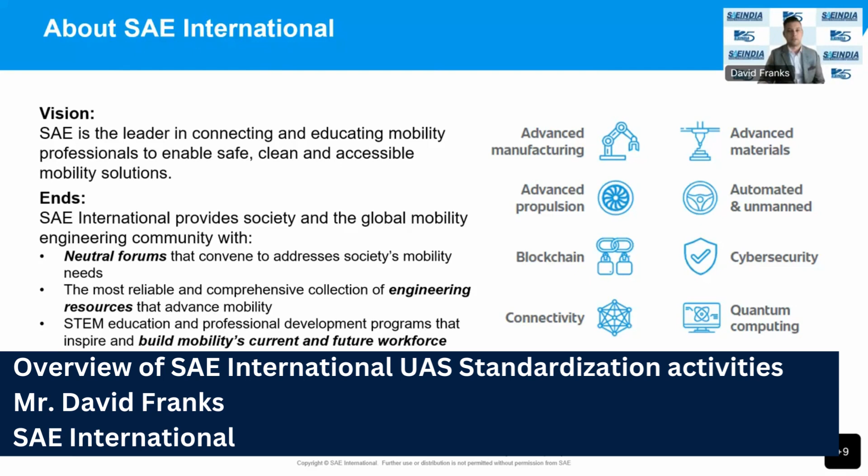So a particular focus that we've been working towards is to create stronger links between our standards and certification. Of course, I think that the number one step for a lot of the AAM OEMs is to get that certification route. So, especially with more and more performance-based requirements with this new technology, some of the regulators are moving towards requirements that are based on performance, and they need to utilize these consensus-based standards that we are capable of helping the industry produce, that detail these high-level means of compliance, or MOCs.

So we really look to our steering groups and our system-level groups, which sit atop our committees. And we look to them to create these roadmaps and guidance that come down and make sure that we're on track to produce exactly what the industry needs.

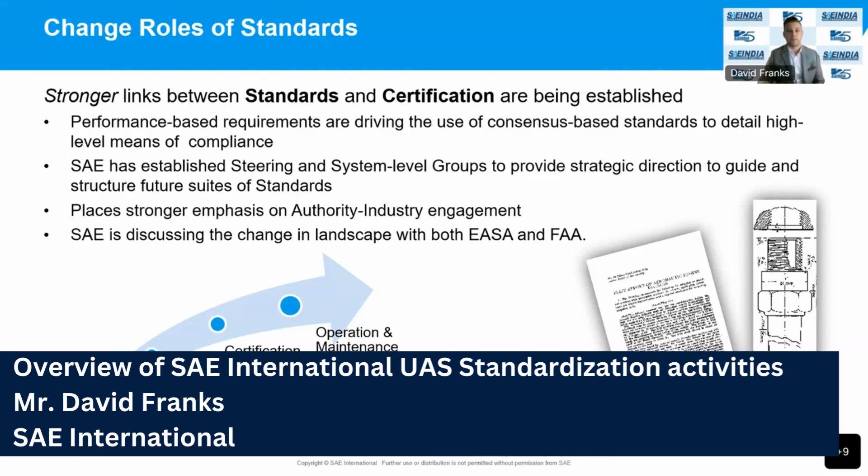Of course, we're in constant cooperation with SDOs and regulators around the world. Working with other SDOs prevents duplicate work, which, as everybody here that participates with SAE knows, it's no joy to be involved in other SDOs as well and see similar work going on at the same time. It doesn't help us, and it certainly doesn't help the industry move forward. So what we do is we have active collaboration and cooperation with multiple committees around the world.

That includes EUROCAE, IEEE, all the regulators, FAA, EASA, other SDOs like ASTM, RTCA, and higher level international organizations, including ICAO, and others. The scope of communication and involvement with the regulators is a great two-way exchange. They get industry perspectives and needs, and the regulators' goals and developing requirements can help inform both industry and standards. And a lot of the success we've seen, especially when forming new committees or new efforts, even new documentation, is that if we can get the regulators on board, industry tends to follow.

So again, it's a great tool that SAE provides to both industry and regulators for that forum where they can both come and speak a little more openly and make sure that they understand each other. So everyone involved in AAM understands the challenge in certifying these vehicles, involving the FAA and EASA and other regulators around the world. And this helps bring those cohesive roadmaps and solutions to bear.

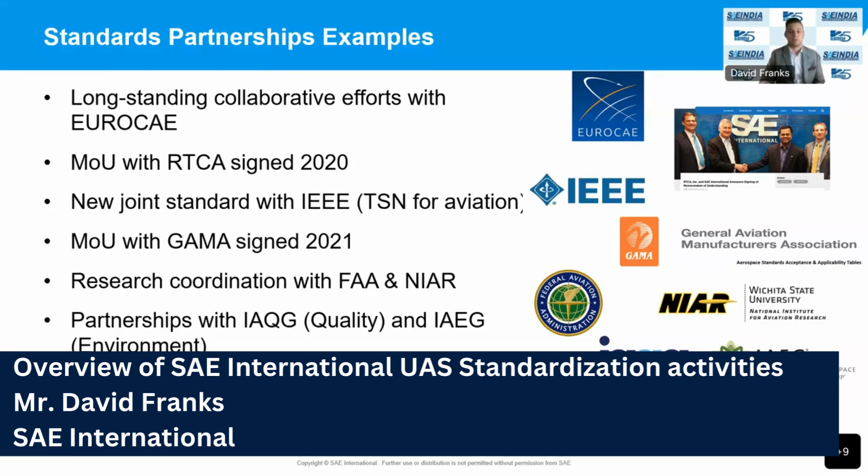So a lot of technology being used and developed for AAM is also present in the advancing ground vehicle and automotive world. Self-driving cars, hydrogen-powered buses, electrification, AI, public acceptance, just a few examples of this crossover in the tech. And that's really a strength of SAE as we have these two standards programs, right? We have aerospace and we have the automotive and the ground vehicle sectors. And they could both benefit from each other's successes. Hydrogen especially is a great example.

Hydrogen buses have been driving around for years now, as well as electrification with charging ports, with that industry being advanced on the ground for years. There's a lot that the aerospace and the AAM world can learn. And that's a strength for SAE, and what we're striving to do is to connect those two industry groups together so that existing tech and standards can be pushed over to the aerospace side for either quick adoption or maybe slight modification to make it work exactly with AAM, and to prevent, again, duplicate work and speed it up to an eventual standards publication, so that we produce those standards more quickly to help those industries move forward.

So the driving factor for AAM is to improve aviation's impact on the environment, of course. And we hear that again over and over out in industry, talking to the OEMs as well as the supply chain makers, the regulators, the city environments, the politicians and the people that are providing some of the funding as well. If it's not sustainable, then they don't want it. The investment isn't there. The industry is, of course, driven extremely by the environmental concerns.

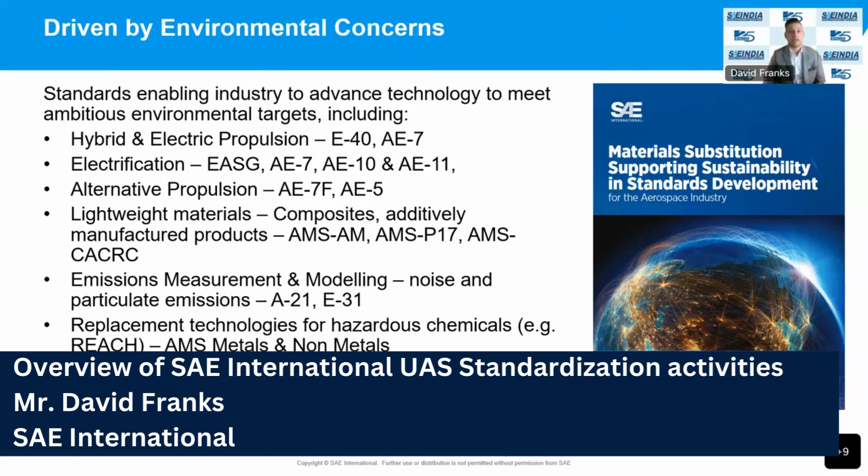So aviation alone accounts for around 2% or more of global emissions. And although we're not a major contributor there at 2%, the industry at large is working to reduce those emissions down to as low as possible. So for example, we support multiple efforts in that realm, not just base standards activities in our committees, but also supporting ACARE, REACH in Europe, ICAO's targets, and other key initiatives around the world.

I know David Alexander already went over this chart, so I'll just briefly say we have over 180 committees, thousands and thousands of individuals, including you all here today, around the world. And we had nearly 700 standards published in 2021. And I believe we're on pace to achieve that and more this year as well.

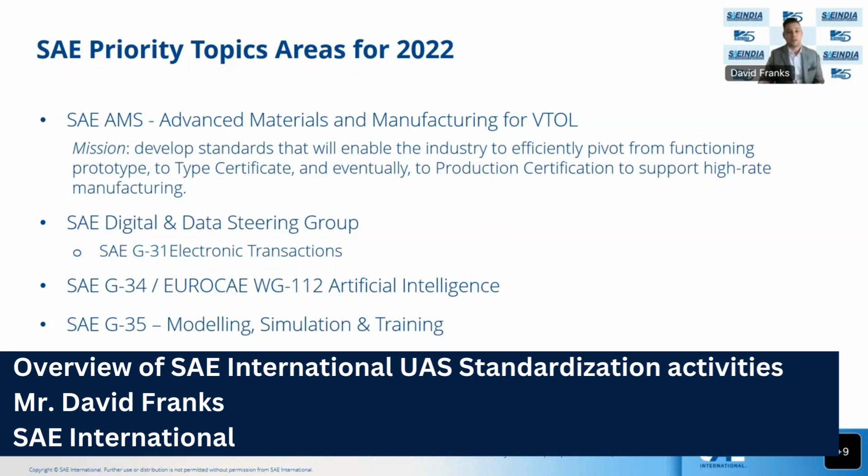SAE priority topics for the year. We set out many priorities, which of course involve AAM. They include advanced materials and manufacturing for VTOL, a digital and data steering group, a joint effort with EUROCAE on artificial intelligence, our modeling, simulation and training group, that's G35, as well as, which is very exciting, a new supersonic steering group. So even though I don't think a lot of VTOLs are planning to go supersonic, it's another part of this new wave of aviation that's exciting to be a part of.

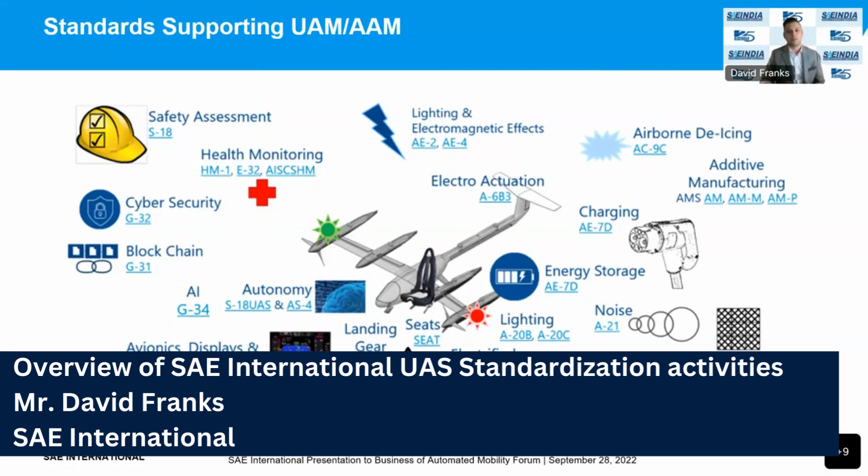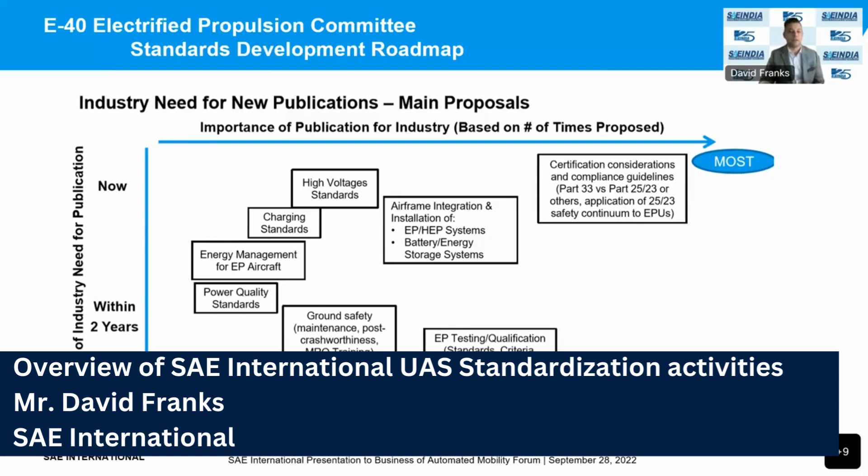Before anything, these things need to be certified and compliant with local regulations as well. And these are ever-evolving topics, but these roadmaps are the key to make sure that we weigh the relevance of what they're after and make sure that we utilize the best resources at hand.

So E40, again, has two newly published documents that have come out this summer. We have an ARP 8676, which is a nice foundational nomenclature and definitions, as well as AIR 8678, which is an architecture examples for electrified propulsion aircraft. So these are both foundational documents, and it's a great starting point.

A lot of times with new committees and new technological topics, it's important that these taxonomy, verbiage, and wording are all worked out and defined clearly, so that the committee itself, as well as industry, all move forward speaking clearly and using the same terminology, which is important so that they all understand each other moving forward. They align the terminology, and it's of course a baseline foundation for consistent communication and these future developments.

It's a very active committee. We see a lot of participation from a lot of the OEMs across the AAM world. I believe it's currently chaired by a gentleman from Lilium, the German OEM. They're now focusing on safety, endurance testing, and considerations for ground support operations.

So with the electrification of these aircraft, especially moving to high voltage, maintaining these aircraft, and even refueling in whatever sense that may take with the different versions of the electric aircraft, ground handling of these high voltage battery systems and engines becomes a training issue and a knowledge issue. So they've moved on to work with that. And we also coordinate this group with EUROCAE and ASTM.

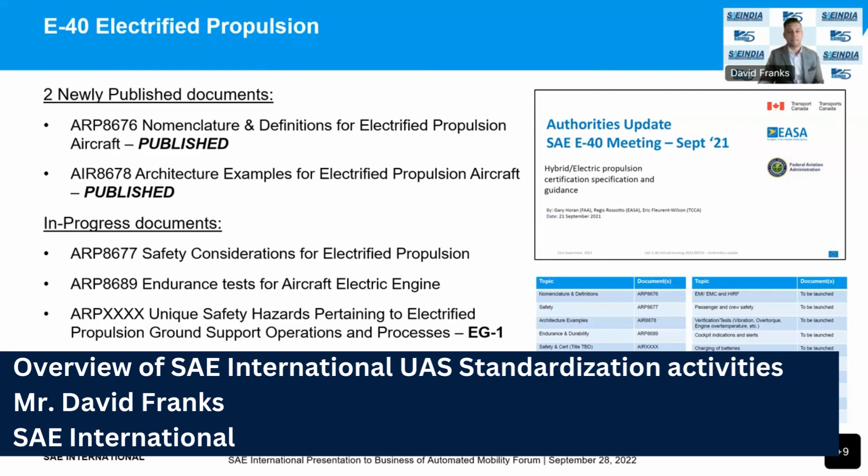So again, speaking of high voltage, we have our AE10 high voltage committee, which is of course focused on the more intricate versions and details of that. So with the use of the new and more powerful forms of electric propulsion in aviation comes the need for these higher power voltages. So these new challenges include propulsion systems, wiring, installation, safety, and charging. And that is our AE10 high voltage committee.

So they've formed 6 subcommittees over what they've deemed the most important subtopics: systems, energy storage, EWIS, equipment and the device itself, user safety, as well as infrastructure. So a lot of their key documents I have listed here. We of course started with definitions, and that's our aircraft electrical voltage level definitions. We have impact of high voltage on wiring. Both of those have been published, and we have a third document here which is close to finalization, and that's aircraft high voltage DC power quality standard.

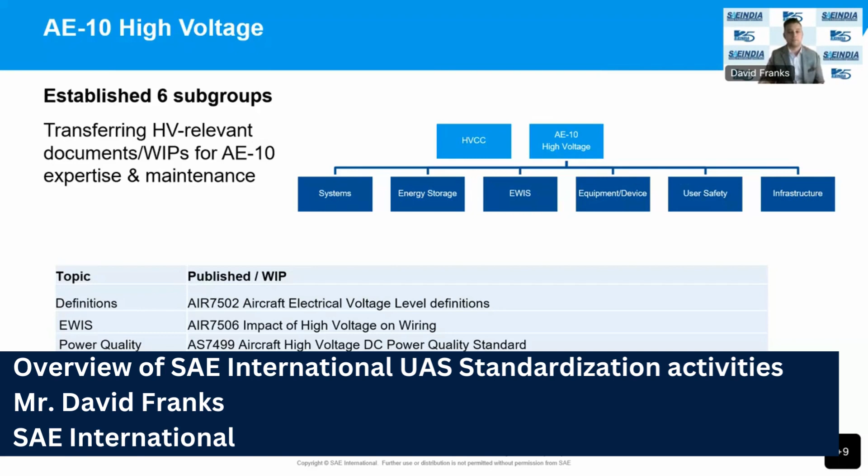So along with electrification, hydrogen and fuel cell technology is also developing closely with AAM as another alternative to traditional fuels. With battery technology's current weight to energy ratios, hydrogen is poised to have a great impact at longer distances. I think as the industry matures and the technology is accepted and public operations begin, electrification will run out of range a little bit, and the industry is looking, especially with the larger aircraft types, towards hydrogen. So hydrogen presents several challenges, both on the aircraft as well as the infrastructure to support it.

So our AE7F committee is working with EUROCAE, Working Group 80, to help advance these technologies and help solve these problems. They have 3 published standards that are key documents that they've used as a foundation. And they also have some newer work in progress, which is liquid hydrogen storage for aviation and gaseous hydrogen storage for aviation. So again, when using hydrogen, those are the 2 main choices so far. Both present different challenges, including temperature regulation and storage and different pressure ranges.

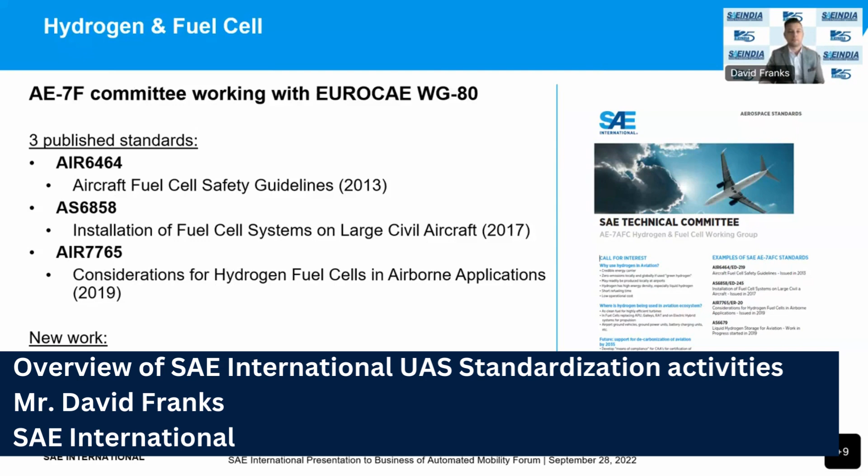It's exciting to see all the different new designs from the UAM and AAM realm. Some of these designs are pushing the bounds on structures and materials to save weight and increase performance. To accomplish this, new manufacturing techniques, new materials, and new uses for existing products abound. SAE has multiple committees and subcommittees established that are working on some of the key aspects

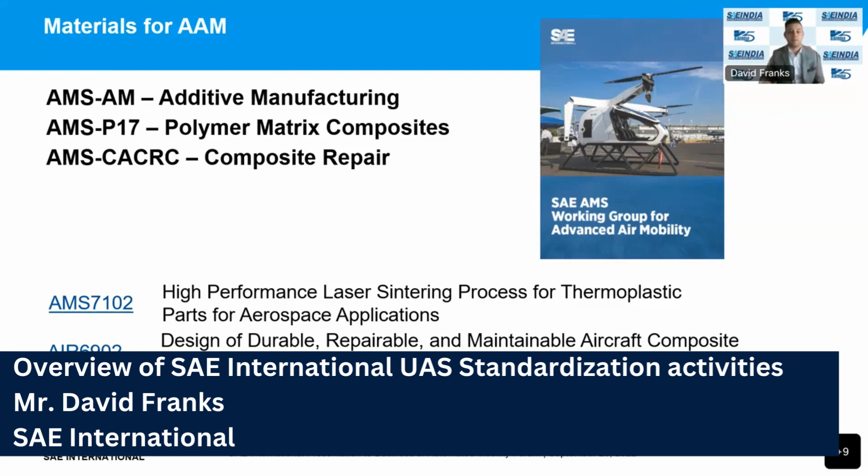such as additive manufacturing, composite repair, polymer matrix composites, really trying to serve the number of needs, especially with the smaller eVTOLs, as these initial rounds of OEMs are really creating these unique vehicles with unique design challenges. And of course, consistent everywhere with aviation is the drive to get that weight down as much as possible to optimize performance.

A great example here is the VTOL seats committee that we already have. And this is a great example of where we took an existing publication in a standard that was written, of course, well before the AAM realm, but was quickly adapted to help and serve the need of the AAM realm.

So they had a kickoff meeting held in just July of 2021 with great representation from regulators, EASA, FAA, the UK CAA, as well as AAM industry members, Wisk, Lilium, Safran, Hyundai, Bell, Collins, and then they did produce that. And it says they're balloted to council, but it has been published, AS 6849, which is performance standards for passenger and crew seats, specifically for advanced air mobility aircraft.

So again, I'd like to bring this up as a great example of where we took existing standards. We took it to the regulators and we involved the regulators and the OEMs and the industry itself. And we said, we have an existing standard. Can we quickly adapt that to what you need and really cut the time down from, of course, starting a document from scratch?

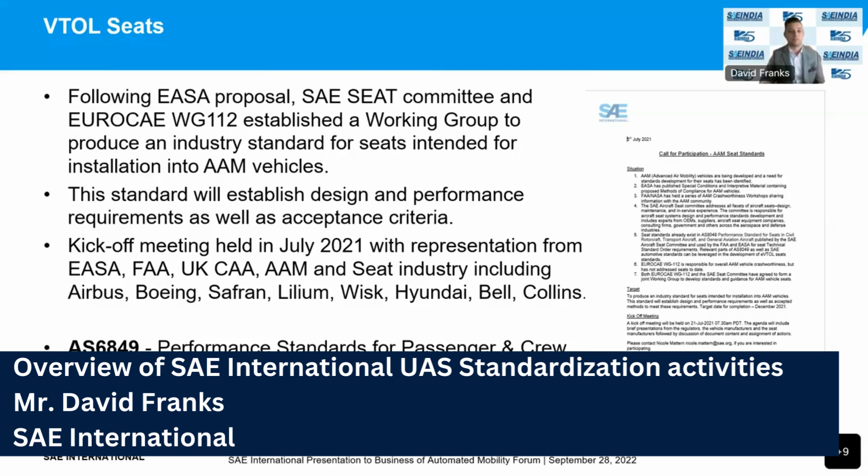A paramount concern for everyone involved in AAM is, of course, safety. New designs, new technology, flying new mission protocols requires that care is taken to safely design, test, and operate these aircraft. So the SAE S-18 Aircraft and Systems Development and Safety Assessment Committee develops and maintains guidelines for processes, methods, and tools to accomplish the development and safety assessments of aircraft, systems, and related equipment.

The group is dedicated to creating, preparing, and maintaining all the relevant specifications, standards, and information material for effective commercial aircraft development and safety activity management.

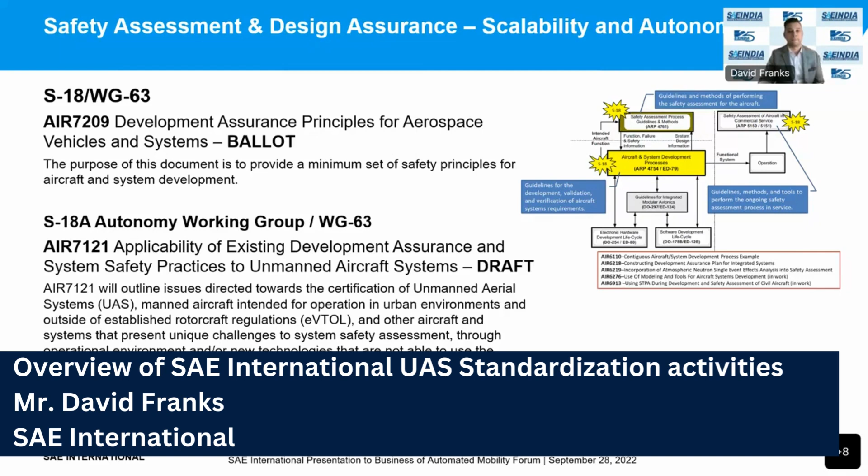Another exciting aspect to the future of AAM is the use of artificial intelligence and machine learning in these aircraft. The promise of UAM and AAM to deliver a safe, equitable, and publicly accepted new era of aviation will require a fully integrated airspace with thousands of these new aircraft operating in various mission profiles without a traditional pilot on board. Artificial intelligence, of course, will be pivotal in making this happen.

And that is exactly what SAE's G34 committee focuses on. It was formed jointly with EUROCAE. Their first standard was published in 2021. And with a wide range of global participation throughout the world's aerospace industry, this group is positioned to help UAM and AAM develop and deploy AI safely and successfully. And it's a key topic you see from the AAM world and the OEMs.

Of course, realistically, these operations will start as 1 or 2 flights with limited operations and ranges. But as their business models dictate in the longer term, they're all driving towards fully autonomous, fully integrated into the airspace, operating without pilots, or perhaps a new terminology, person in control from a remote ground station or dispatch.

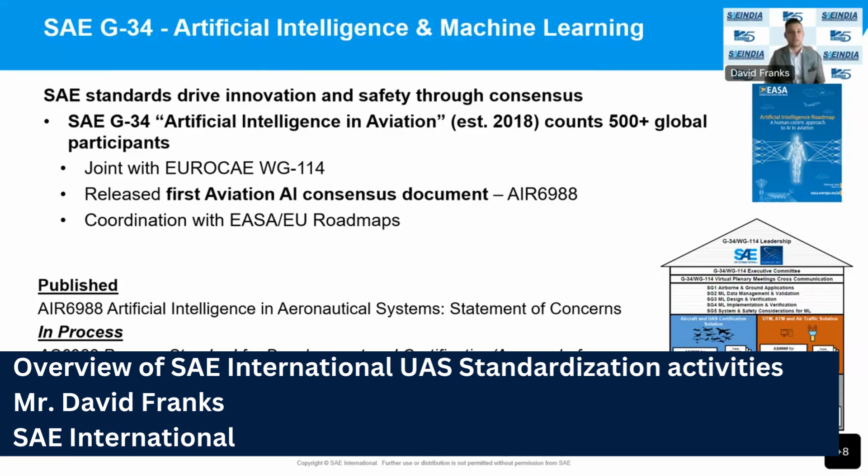Another key group that we have here is SAE's G35, which is modeling, simulation, and training. A key to the AAM success will be the use of new, efficient, and safe methods for training, pilot crew certification, and the use of simulation. Simulation in particular is used in model development, flight testing, and training, with new technologies emerging and the role of the pilot and crew changing with some of these new aircraft designs, if not all of them. There's a need to develop guidance on best practices for modeling, simulation, and training.

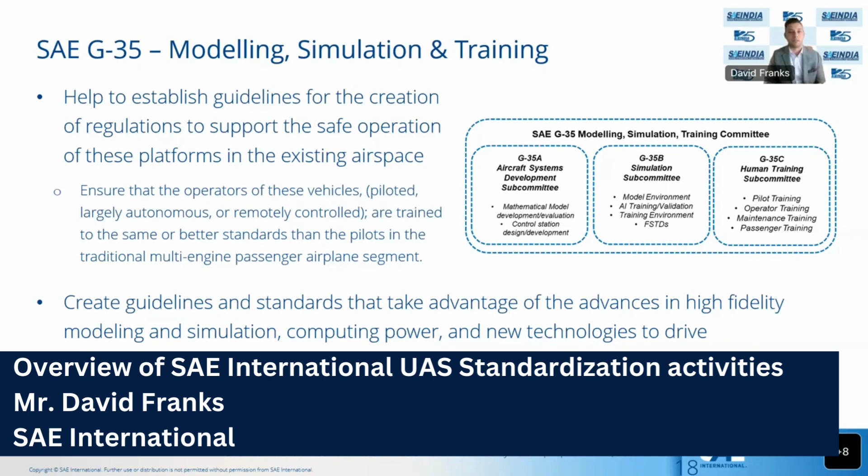So our G35 committee was established to bring industry together and solve these problems and provide that guidance to the AAM ecosystem, passenger cargo aircraft OEMs, flight simulation training device manufacturers, as well as everyone involved with crew certification. So they've broken off into 3 subcommittees. We have G35A, B, and C, focused on key topic areas: aircraft system development, simulation, and human training.

There are multiple standards in progress right now. They have listed here taxonomy, again, another foundational document clearly defining the technologies at hand, pilot training and qualifications specific, again, to VTOL capable aircraft, technical standards for VTOL capable aircraft training devices to support evaluation, as well as modeling and simulation to support certification of aircraft and avionics.

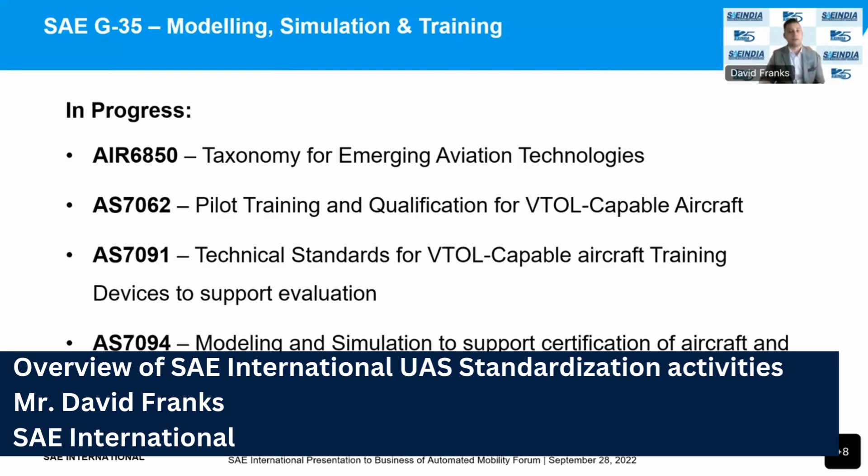Again, that first step to a lot of these key technologies, especially new to the regulators, is getting them certified. Involving them into these committees and these processes early is key to keeping that industry aligned and moving forward so that they don't get too far ahead without complying with the regulators.

So along with safety, noise is a primary factor in public acceptance with these new aircraft. The promise of thousands of new aircraft flying in urban, suburban areas brings the concern of how new noise profiles will affect the population around where UAM, AAM will operate. Almost everyone knows the sound of a loud helicopter beating its way through the air, or even of a small quadcopter buzzing and whirring over our heads. The different configurations of rotors, of loading on the different propeller sizes and motors of these new aircraft will have to fall into an acceptable level of noise, depending on how and where they operate.

Again, speaking to a lot of the regulators, and really at our level, at least in the United States, we have the city authorities where these will operate, and almost their primary concern, of course, besides safety, is where will these operate, how loud will they be, and will they be able to operate below, of course, current noise thresholds, be able to operate without the public kind of rejecting the level of noise that they bring as a nuisance to the areas of where the vertiport may be, or additionally added noise to existing airport infrastructures.

So what we have is SAE's A21, and it's an established committee already, and that focuses on aircraft noise measurements and aviation emissions. And of course, noise can be viewed as an emission. Some revisions to existing documents have already been made to prepare for AAM, and there are other relevant works in progress as well. That work in progress example is monitoring aircraft noise and operations in the vicinity of airports. That describes system description, acquisition, as well as operations.

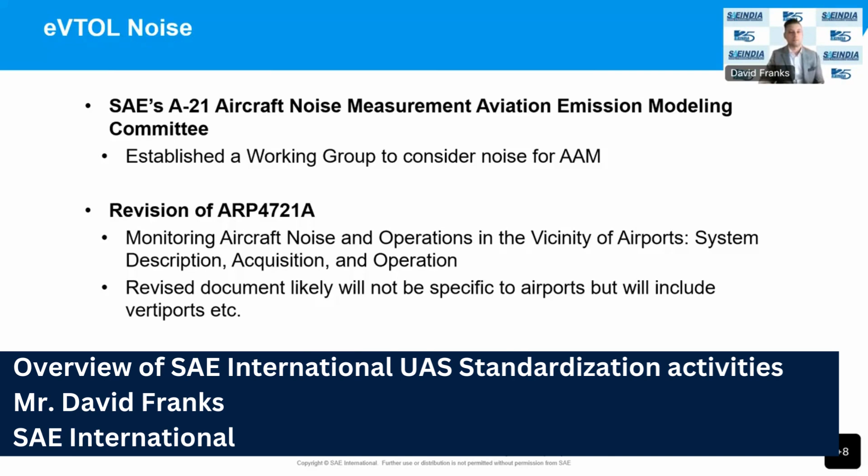So real quick here, we have in the new year, of course, Aerotech in Texas, which is our seminal aerospace conference for SAE. AAM will feature prevalently, of course. That is one of our key focus topics and includes so many great technologies coming into the world and being pushed through all around the world.